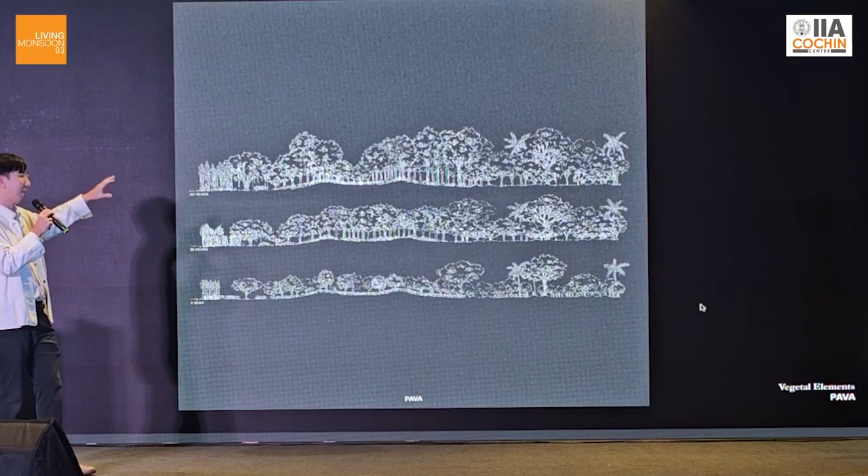From the bottom one is the first year of the planting that we are studying on, and it keeps growing to 15 years, and keeps growing to 40 years. We can start to understand the complexity, the biodiversity of the tree that forms a super complex space in terms of landscape architecture.

So it's very challenging working in the Thailand context. The flood is so normal, how can we design the architecture or the landscape that fits this complex scenario of the flooding crisis.

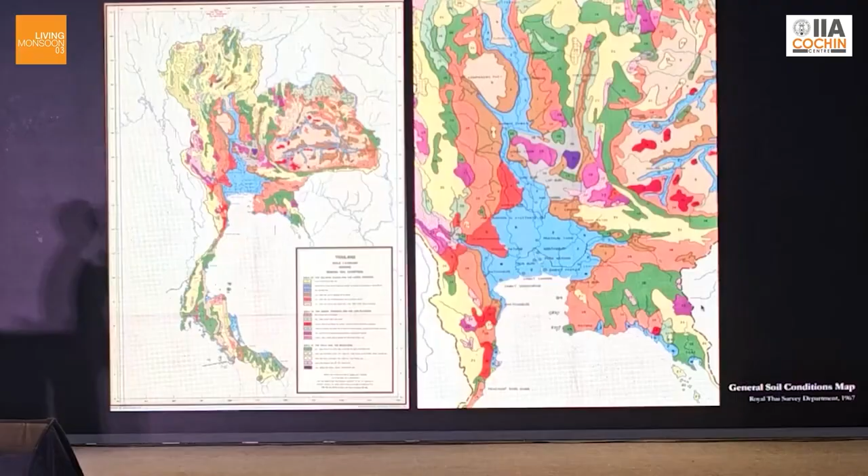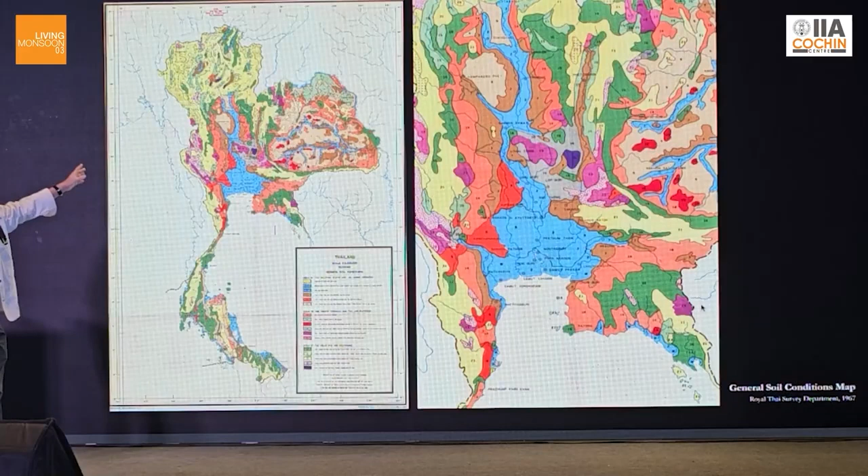Look at this map of Thailand. Bangkok is in the middle, and we have 4 main rivers coming from the northern part of Thailand, combining to form the main Chao Phraya River in the center. Because of the heavy rain of the tropical climate, the amount of water affects the soil so much that we need to find an alternative flooding design in Bangkok.

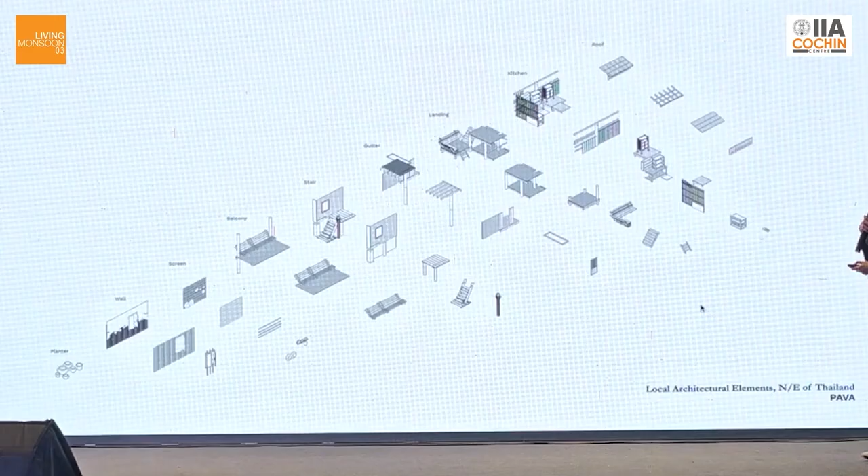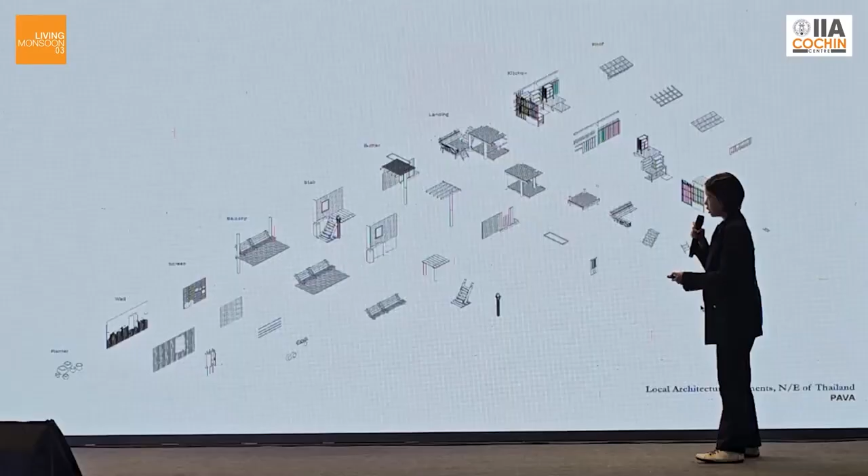We try to record everything that we found in every project. For example, we record the vernacular architectural elements here, like the wall made of bamboo finished with clay, or elements like balconies and stairs—many architectural elements that embrace our life.

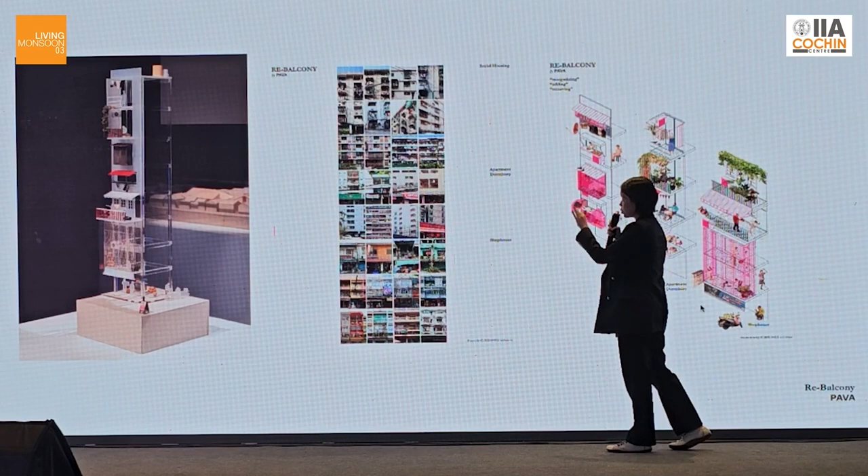Moving to the city, we're concerned about urbanization as well. This is our project researching adaptation during the COVID situation. We all know the balcony is a very important part—it's free, extra area in the house to get close to the outside. We observed what happened in social housing areas, and found that people can easily adapt it themselves, buying things even online. It doesn't need to be expensive to get a comfortable or extra space to utilize.

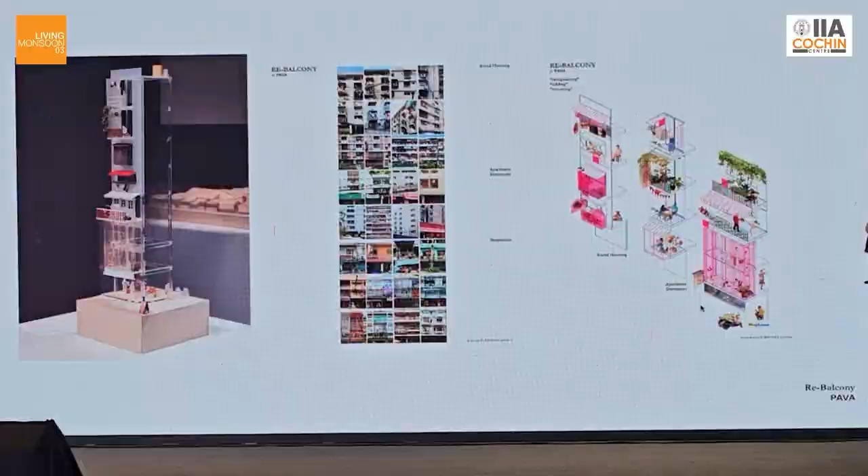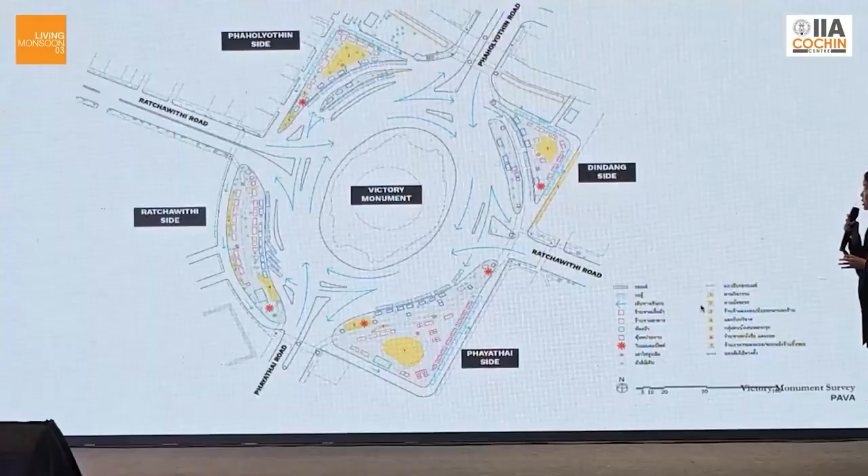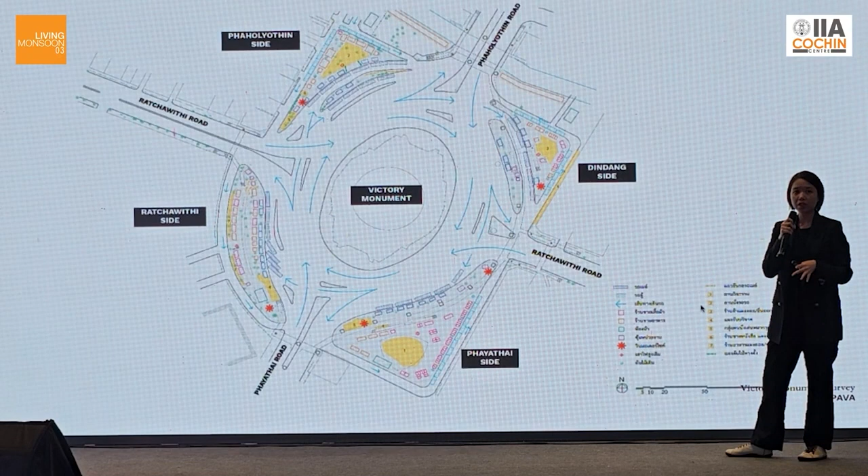Another ongoing project is Victory Monument, where urbanization changes the way people use public space. We try to observe what happened there and improve the connection between the 4 islands around this roundabout, because this area functions not only as a landmark of the city but also as a main transportation hub. Nowadays we have to embrace inclusive design to allow everyone—not just adults who can walk freely, but also handicapped persons—to walk around this area safely.

So in every project we do, we try to understand everything that happened. Like our introduction says, time, place, and context really matter.

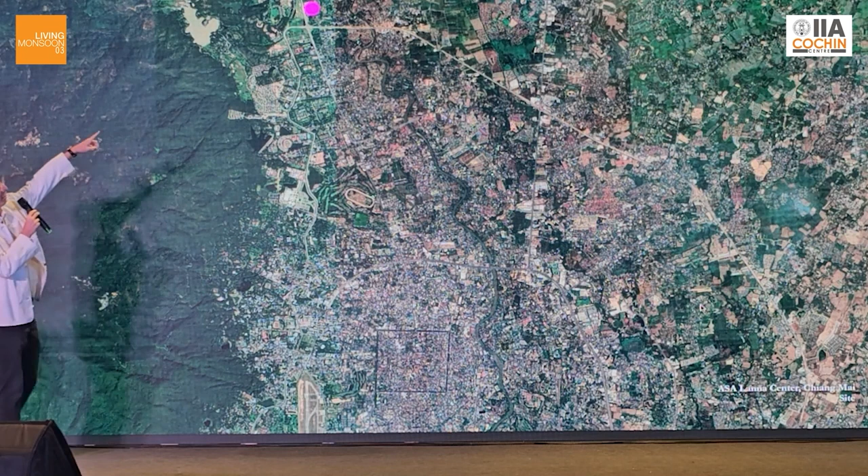When we received the brief for the competition, Chiang Mai faced a lot of flood crises, like the flood crisis you have here in Cochin as well. It's a big issue that a lot of development doesn't care about nature, so when rain falls, they don't have good water management practices in the city. We suggested that as architects, we design architecture that contributes to flood mitigation or water management for the city—that's what our project is about.

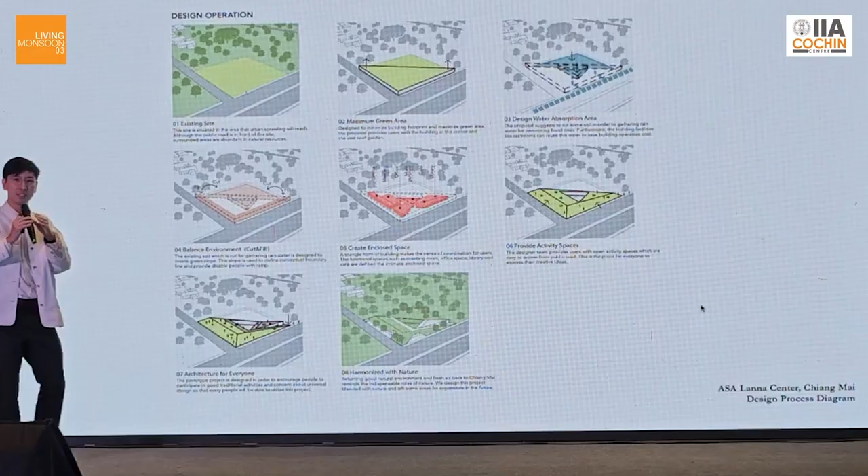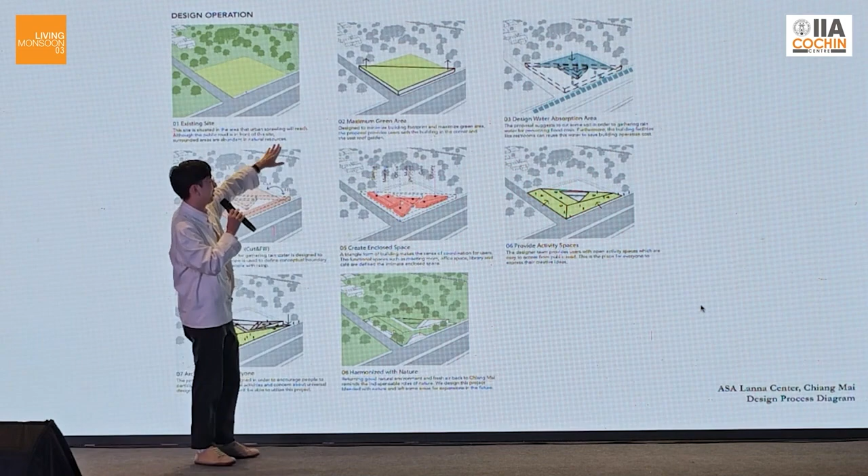Here is the perspective we did 10 years ago. The main idea of the project is: do we need to cover 100% of the site footprint? We suggested doing only half, 50% of the site location. You can see at the back the arrow pushing down.

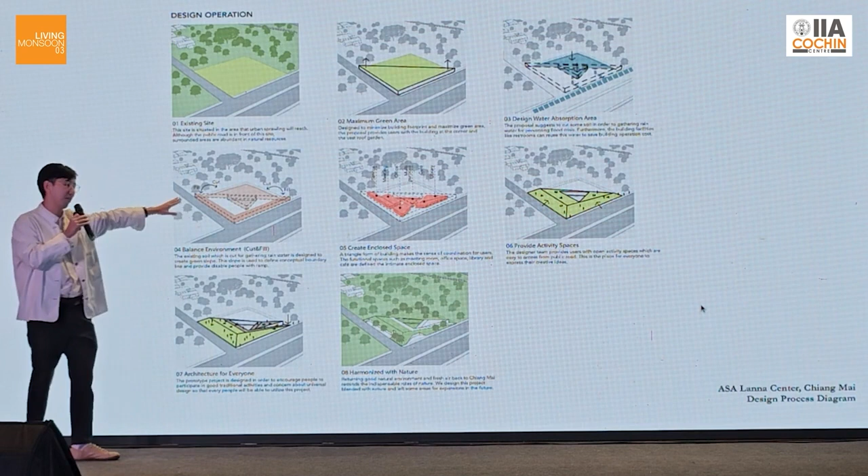In landscape, we call this the cutting and fill technique. We suggest cutting the land at the back of the site and filling at the front to create a water retention area that helps collect rainwater for the city. We also have a small courtyard that minimizes the programs and creates an intimate space, with landscape as the architectural facade, suggesting a universal design diagram.

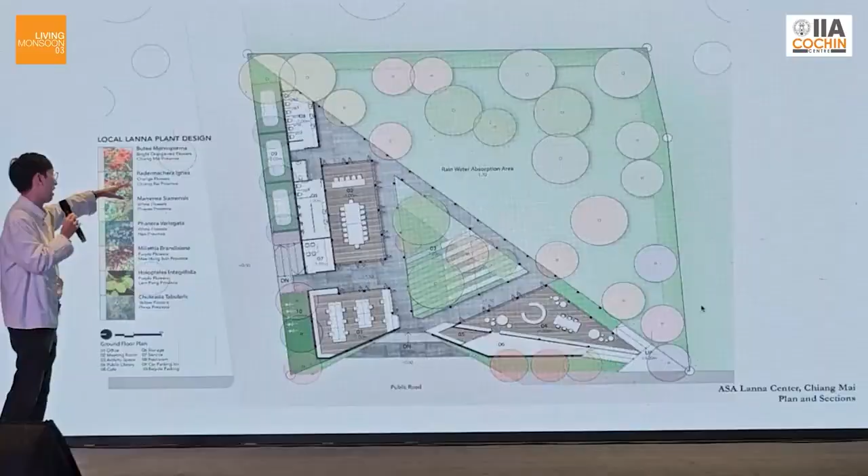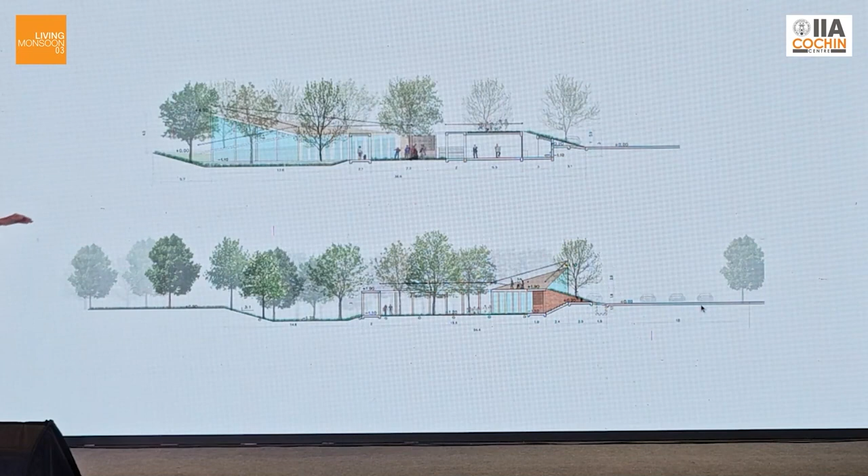Here are native plant species, chosen so we don't create a lot of construction waste. We suggest low maintenance plants that can farm around the site area to form the facade, minimizing the parking lot. Here's the courtyard and a section showing how the back of the project is cut down, using that soil to fill the front of the building, creating connectivity to the public street and a roof garden.

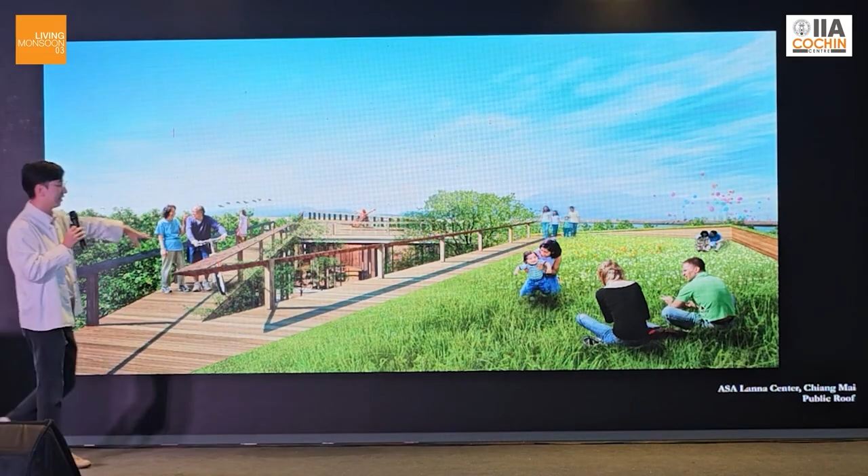This is an old tobacco drying estate since 1955. This is the spirit of the place, and we have to accept that. When we first visited the site, we were inspired by the ambience—the old barns and big trees coexisting—and we wanted to preserve this spirit of the place, because it's the core value of the site.

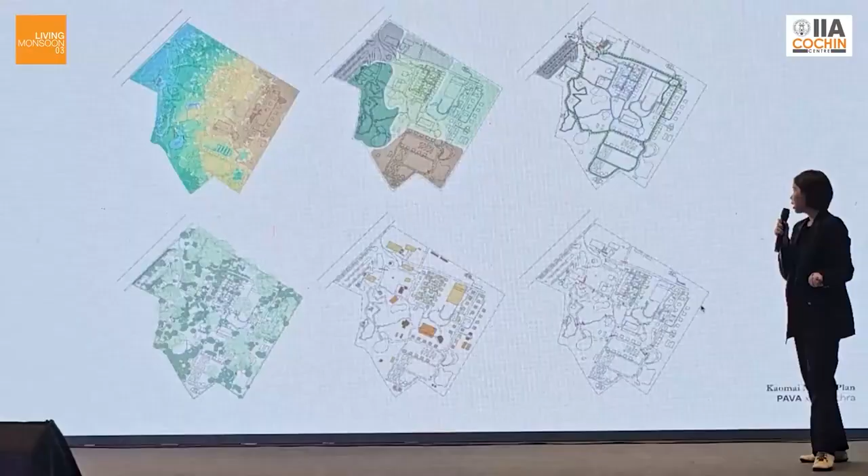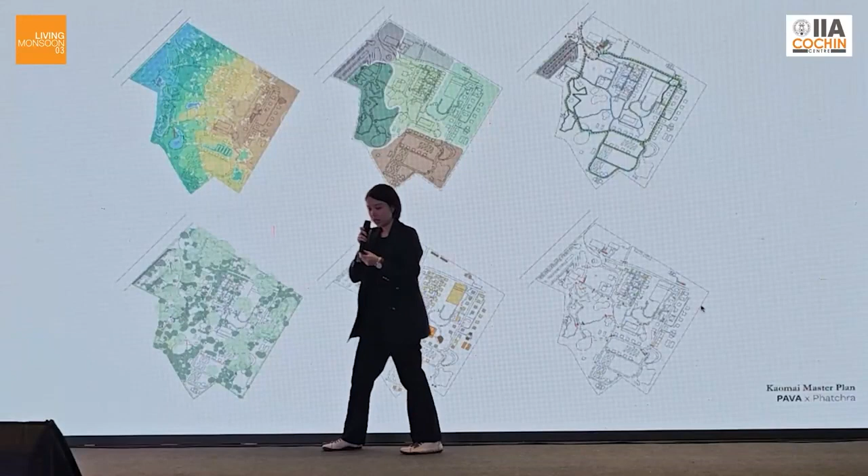We wanted to understand everything on site before starting to design the master plan. It's an incremental master plan, since we've worked on this project for so many years. We tried to understand the water flow—fortunately the conservation part is at the high point, which is useful. We also designed the flow so as not to disturb the hotel at the center.

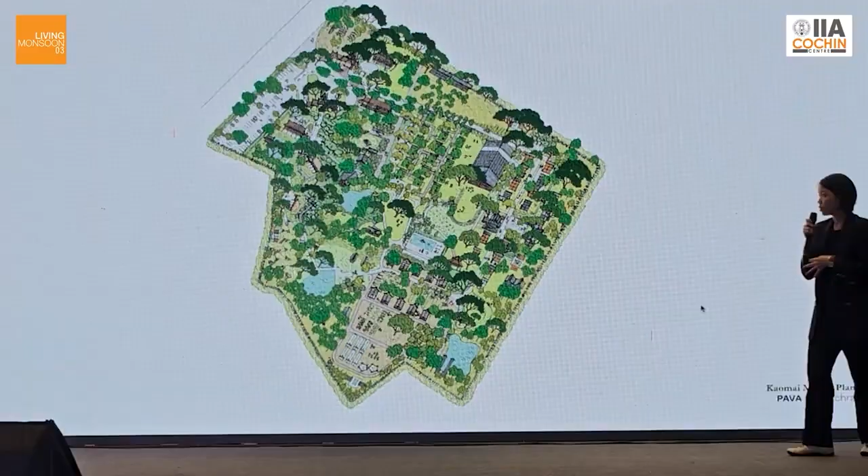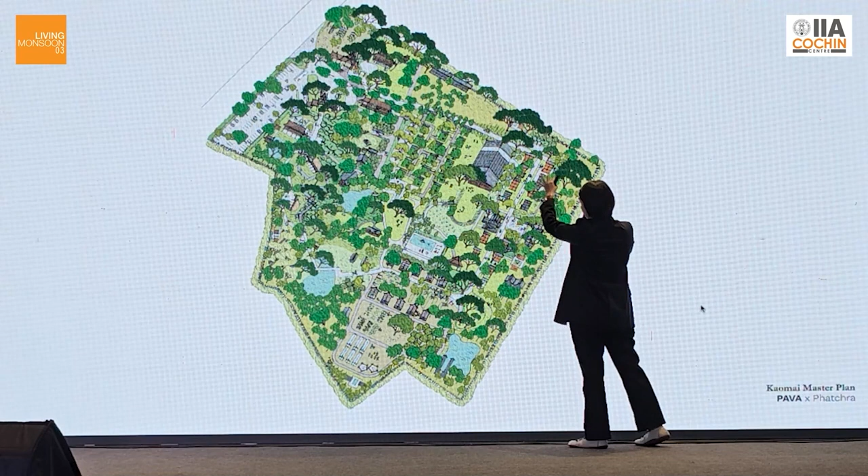We did building inspections to understand every situation on site, and tree assessments to keep them healthy. This is the overall plan where we tried to draw everything and propose something new. This drawing is to scale, since we measured everything to understand it. You can see the conservation part where we tried to keep the old as it is, blending in new functions inside.

You can still see the real witnesses of time. This is a wild preservation area and agricultural area, with many programs coming up.

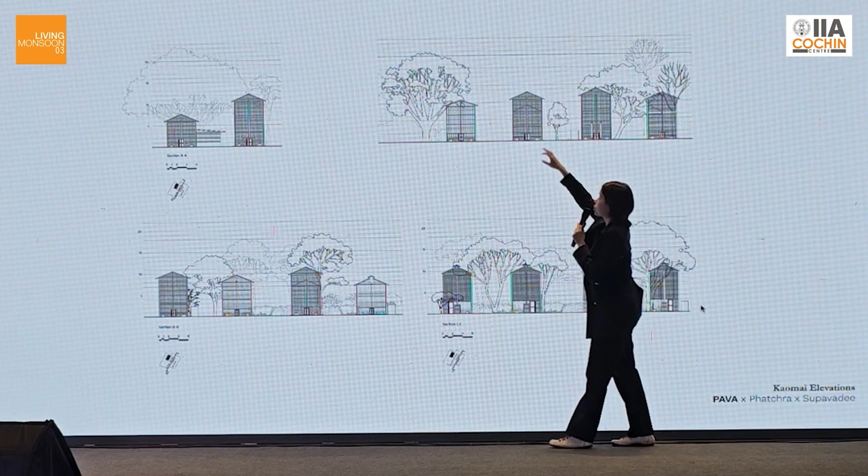This is the building inspection we did. You can see the trace of the old tobacco drying barn from when it was in full operation—they could just build it up. There are so many sizes, and here's the tree documentation we drew.

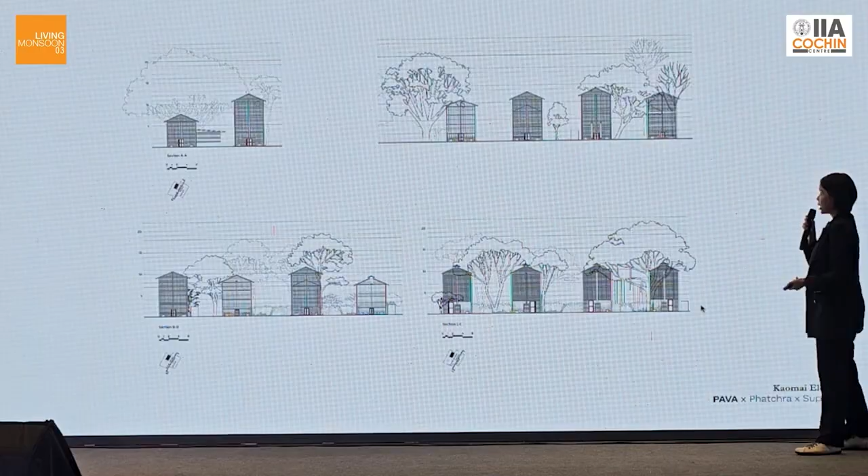This drawing differentiates between the new and old conditions. It used to be very dry around here, but after they stopped the drying process, the trees naturally grew up.

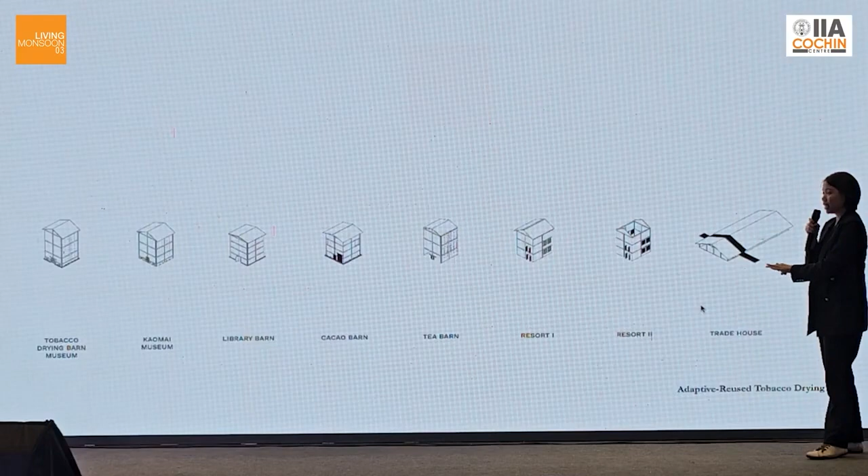In this new building, we had to strengthen each barn differently. These drawings show all the barns where we did interventions—we proposed subtle interventions for each one. The white part is the old element, the black part is the new one, ranging from minimal intervention at the tobacco drying barn museum to more extensive intervention elsewhere.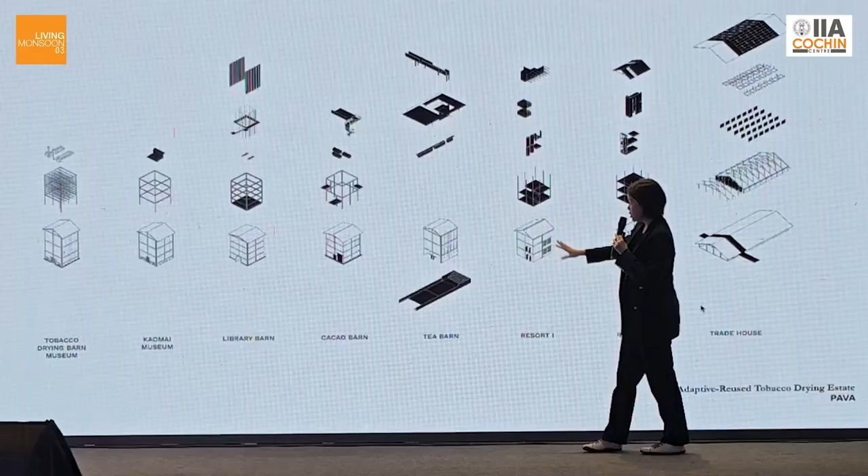For example, this tea barn is quite dilapidated, so we have to reconstruct them again. And the other, the resort part and the trade house, we do intervention for. For more detail about the museum, the first one is in quite fair condition.

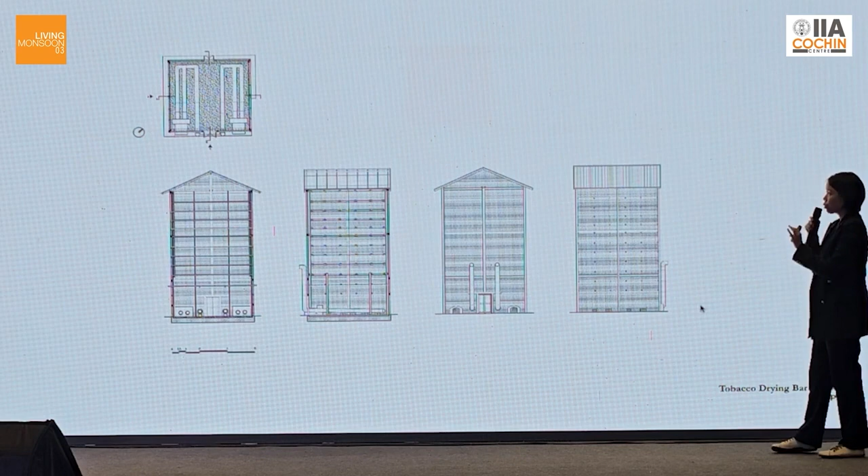So we draw everything, we repair as original, we reinstall the elements that are gone already. This is the overall. We reinstall the furniture, the heat pipe here, and keep the size and typology of the barn, 6 by 6 meters, with the gable roof.

And this is the inside the barn, that we keep as original. The only element that we add is gravel floor and lighting. It's very subtle. We want to propose the subtle design dimension. This is our core strategy because we want to keep it as it is. We believe that in order to learn about history, to understand about ourselves, we need to see the real evidence of time. This is the other generation that I mentioned before.

This is the overall of the estate. We want to highlight this because of the way that we preserve the coexistence between the big trees and the barn. You can see here, we didn't use support to the tree, because we adopt arboriculture techniques to maintain them together. For example, in this one, we use the technique called crown raising and directional pruning to balance them together.

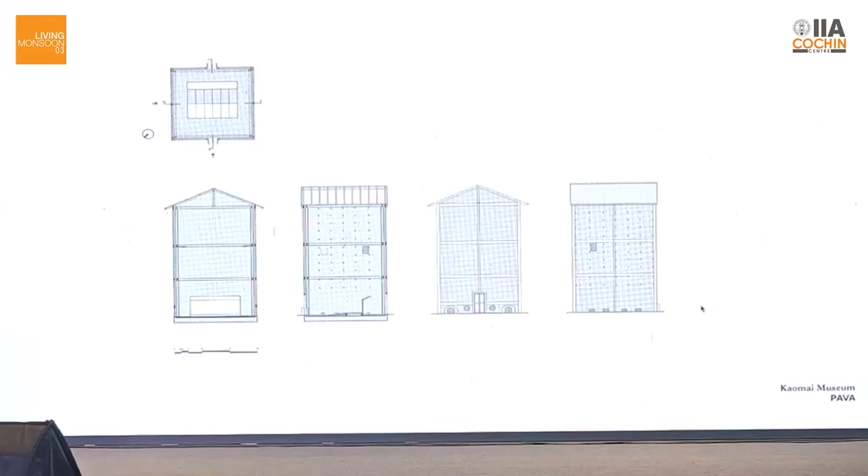The next museum, we have to strengthen them, so we add the steel structure inside. This is the way that we put the steel structure on top, because we cannot put it from the front. This is the ambience inside.

We put the introduction here that we call the timeline panel, because in this project we allow the visitor to walk freely. So we put it here and allow them to walk, to choose to see inside by themselves. Also this kind of steel structure we added here because we allow the extension phase in the future. This is when it glows in the dark, reminding us about the past of the project.

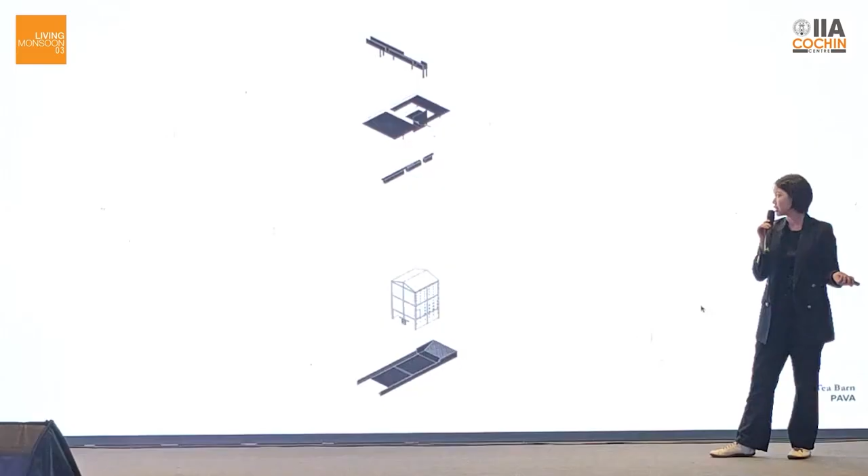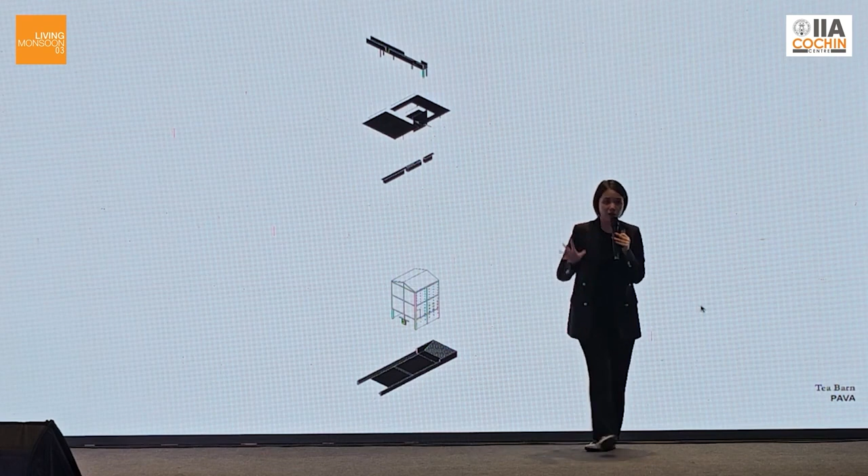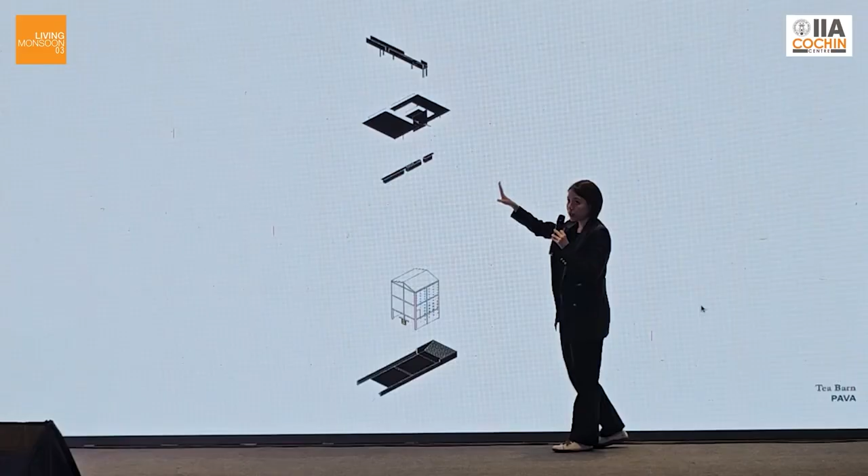This is a tea barn, in quite dilapidated condition, so we propose to reconstruct them again. And in order to contain lots of people, to embrace the public program, to fit our modern day living, we propose more steel structure to be able to contain people and also provide big shading for the area, and also other elements to support tea drinking culture. This is the existing condition.

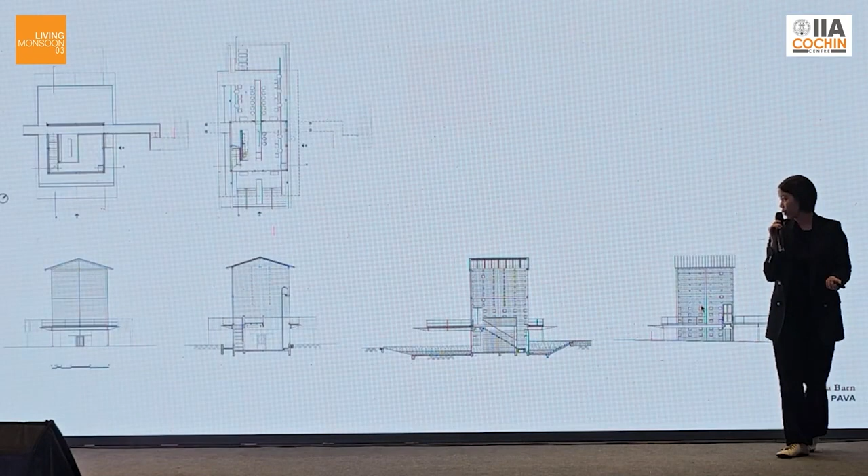When we have to reconstruct them, we have to measure everything and pack it like this, label everything and put it back. This is all the drawing that you can see, the sunken space, the big roof there.

Also we provide this area with many kinds of furniture by the local artisan. You can see here, it's very subtle design that blends into the existing barn. Another side of the building here, the sunken space will connect the nature, blend into the nature inside, also function as water management here.

We use granite here, reflective granite, to reflect the trace of this heritage. This is the ambience inside. We reuse this brick to create the counter at the center again, which you can see here. It's a very old one, and the detail of the furniture.

In every project, we have to accept that in our country we have limited resources, and we have to revise our drawing, like for this one, about 10 times, to fit their skill, to fit the local artisan skill.

And this one, adding steel structure to cover people, it's very helpful when it's raining there, because there is no roof that can cover people when they come here. This one functioned very well during that time. This is at night, the lighting also glows and is very subtle.

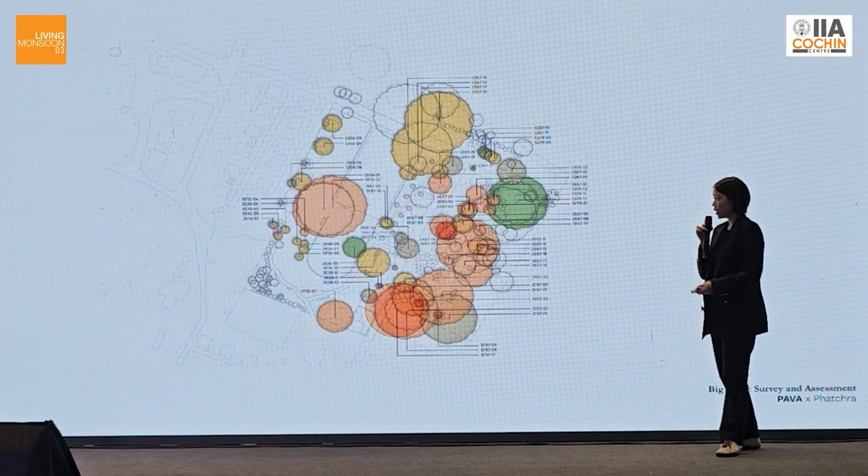This is the overall of the project, that we can still keep the coexistence since we arrived here. And this is the way that we record to check the health of the big tree. This is the way that we adopt the arboriculture technique on site. We label everything and put the signage everywhere to indicate, to allow people to learn, to use as a recreational space as well. Also, not only the barn and the big tree that we can preserve, we still preserve more than 100 species of birds and wildlife.

When we met the owner for the first time, he told us that he really loved to live in a timber house when he was young, and he was also impressed by the scenery of the Mekong. With his down-to-earth personality, he is very humble. These kinds of things inspired us a lot.

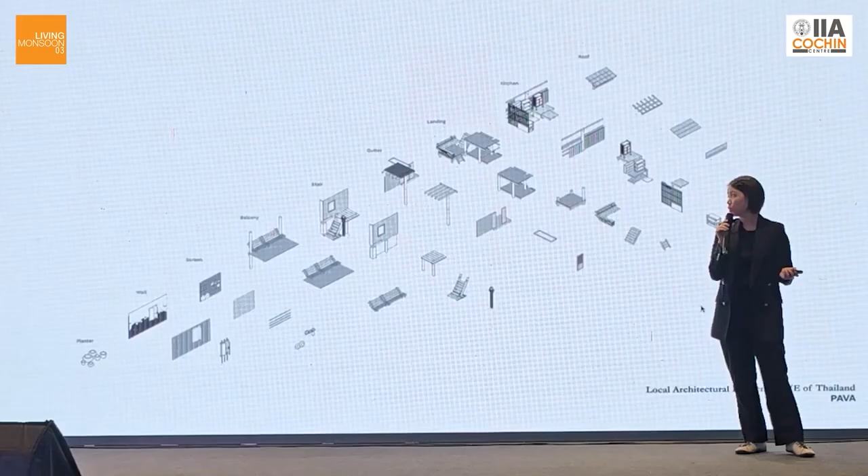Also the vernacular architecture around the area inspired us - this is the house of the monk, vernacular architecture of the group of people we call Thai Lu, and another part we call Thai Dam. We tried to record everything I mentioned, and we proposed the house parallel with the Mekong River, with a setback following the rules.

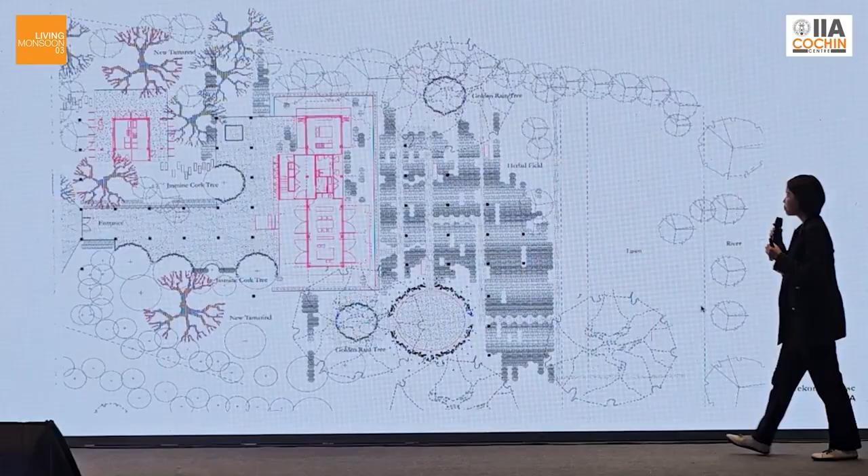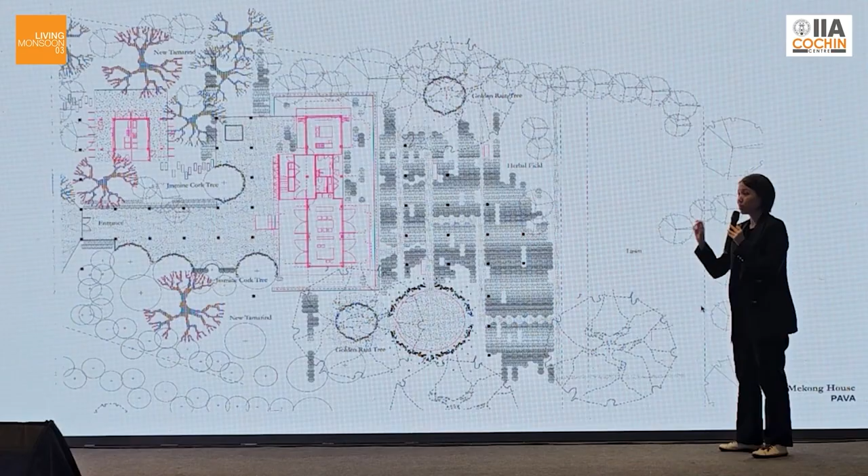Here you can see the very simple rectangular plan, like a modern plan, but we optimized the timber structure to 4 by 4 meters. A very simple one - it's like an open structure that allows life to blend inside.

We reuse wood from a rice mill, and this is a working drawing that the owner, us, and the contractor worked on, on site. In this building, the owner worked really hard with us - he can remember every piece of timber that he got. It was constructed piece by piece, which you can see here.

This one is quite clear - we simply use the timber structure honestly, a very straightforward one, and we pack all of the MEP system at the center in order to not obstruct the view of the Mekong River.

This is our simple plan here - it's alive inside, and we pack all the toilet and system at the core. You can see the dash line here, like a balcony on top, cantilevered, with a very big roof here. So for sure the user can live comfortably inside.

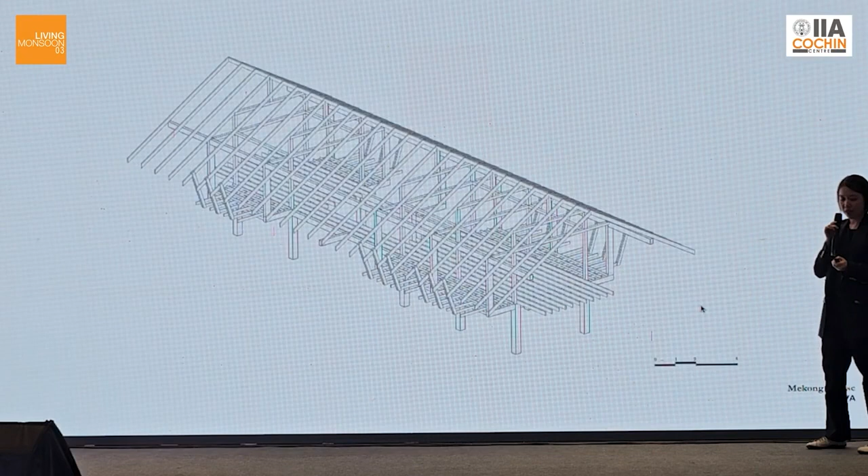This is the structural diagram, straightforward structural, and this is our big roof. So normally in Thailand we can sit here at the transition space when it's not too hot, or even when it's raining.

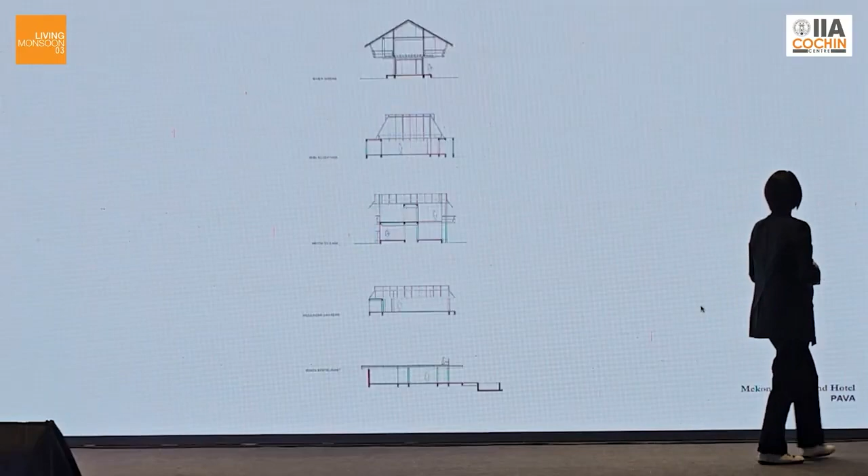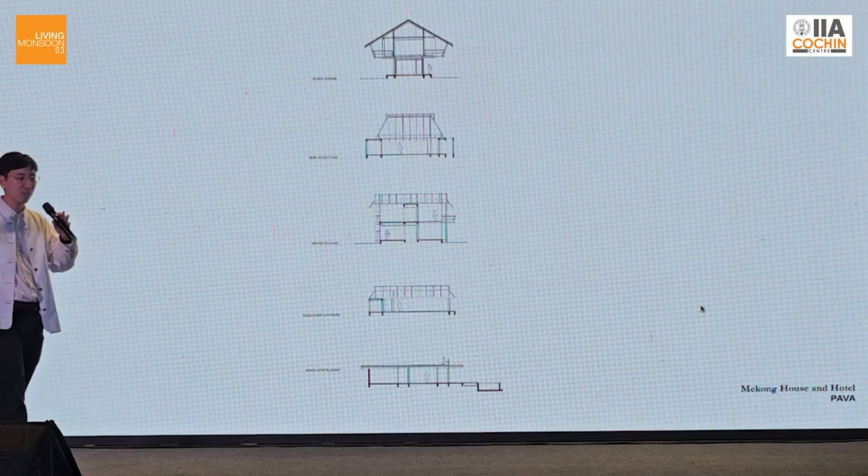After we finished this house design, we tried to develop the idea of a compacting plan. It's like a skyscraper, where the circulation and MEP was packed in the middle of the plan. We're developing the idea to turn it into a hotel in the future, trying to find a way to minimize the construction budget.

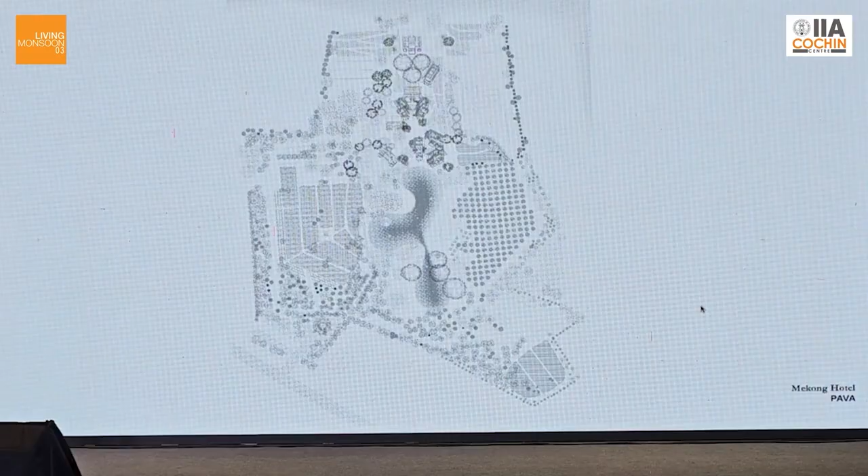Right now it's a work in progress on the hotel design we are working on. Here you can see we developed local craftsmanship to create very special material textures, with native glass and earth that's painted onto the wall. This is the hotel we are working on, in progress.

As I mentioned this morning, you can see a lot of shading here. It's the beauty of the tropical climate, where the sky is so bright, and because of the roof you can see the darkness and some shading and shadow that is very beautiful.

Another thing we want to point out is that we want to show people that using timber doesn't need to be all perfect - it can be different colors, different textures, but combined together. We think good design doesn't need to be perfect, it can be imperfect, no need to be perfect. I think that's a very special sense of the design as well.

Here is a photo we took last year - it's like a tectonic where you can see we tried to minimize the timber structure. You can see we tried to cantilever the structure as much as we can, because we want to reduce the number of timber columns.

We use only a few columns, cantilevered in all directions, to gain a lot of usable area for the project. Here's another roof angle that we studied from local vernacular architecture, fitted to the climate conditions. Here is the interior space.

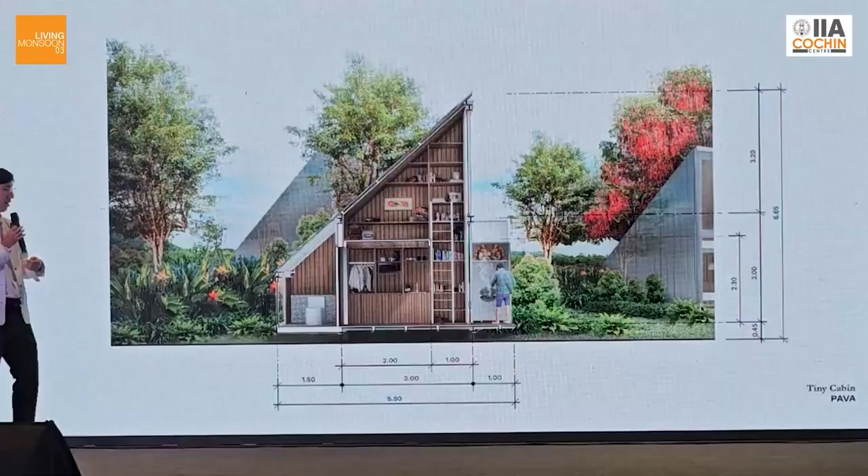Only 4 columns of steel structure - one, two, and one outside, two - with a basic gable roof structure that collects the rainwater here. We call this the rain garden. We pick plants that fit the water conditions, and we contain this water and move that amount into the watershed area.

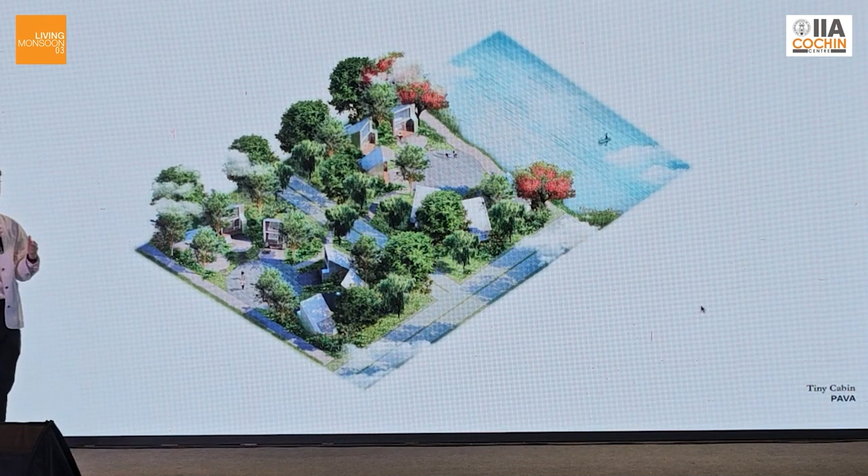Here's a diagram we showed to the client: we have a small footprint for the hotel and the housing, and all the tiny cabins collect the rainwater together as a network, combining it and letting that natural flow of water go into the watershed area.

You can see the view angles are not blocked by each other due to the strategy of the site plan. As I mentioned, the 4 columns use steel cantilevers again, and we picked a galvanized steel finish with a reflective effect of nature to try to blend visibly with the landscape.

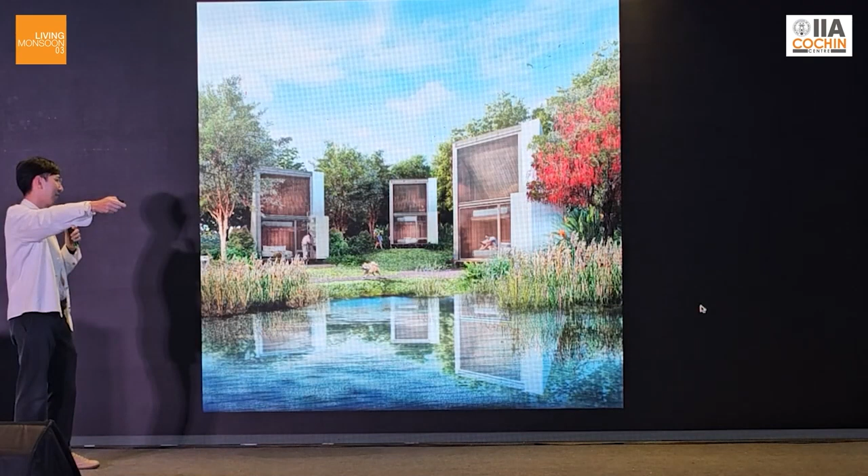I heard the sound, but it's okay. It's the ambient of the design.

And here is another view angle of the tiny cabin.

Before building the mock-up of the design, we worked with the client on how we could regenerate and help increase the fertility of the soil for the project. So we planned an event that helps increase the nitrogen in the soil here.

Okay, and here is the very first mock-up that we took last year. Here, the 4 columns of steel here is like the back of the bedroom, and you see the rain garden at the back of the roof here, and we have a little bit of skylight that allows natural light to come into the bedroom. On the left hand side is the mezzanine of the bedroom.

At night, we test the lighting fixtures in this project, and that's the plan we started doing almost 2 years ago.

And we moved from a very small project in southern Thailand to a very big project in Bangkok. We did a medical program as well, right in the heart of Bangkok. We've been working on it almost 4 years already.

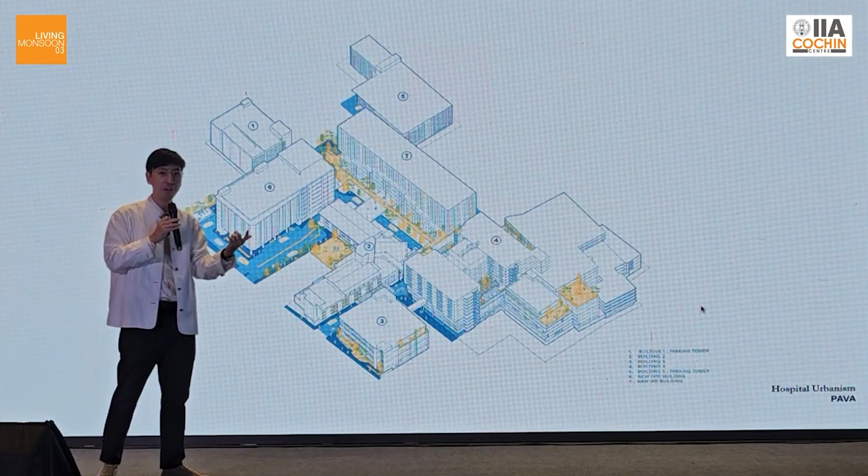Whatever we can do now, we do. But in the future, we're planning for the larger infrastructure that helps improve the condition of the hospital as a whole, in the long run.

So here is the first example of the quick fix approach. We found an empty space inside the hospital - here is the existing concrete roof. But the problem we found in the hospital is that there isn't enough waiting area for people. People have to wait 6 hours.

So we introduced a minimum intervention that helps increase that waiting area while also increasing the green area. And here you can see the steel structure, which is so minimal.

And here is an example of the wide span structure, with a double roof there, adding more green and more finesse to the hospital. And you can see that we cannot add a lot of weight.

So the thing we decided that is so invisible is the mixture of soil here, which we developed with a horticulturalist, trying to mix earth that isn't too heavy to place on the roof, and plants that aren't too heavy either.

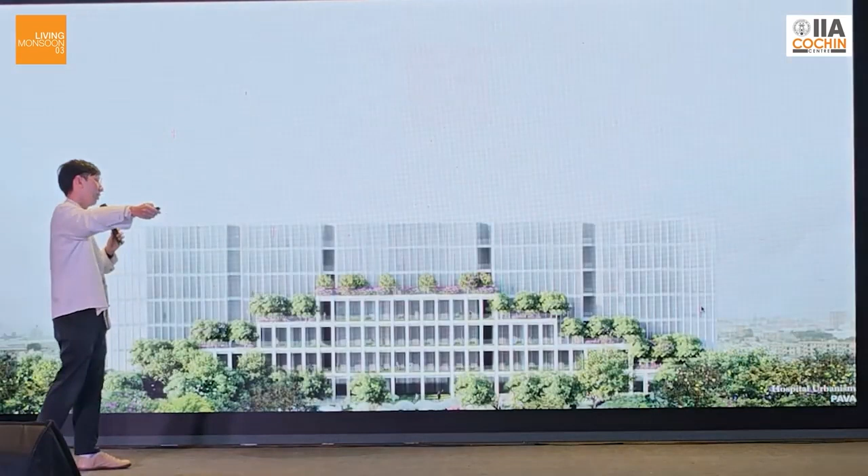Here's a perspective that we sent to the client, and also a progress shot of the construction. We also developed the typology of the treatment room, examination room, and some therapy spaces inside the medical programs. For the future phase of the larger project in this hospital, we want to create a green corridor that links all the existing buildings together, improving the social infrastructure and green infrastructure, and providing a very good quality of life for patients and everyone inside the medical campus.

Okay, last project. You can see here that our project embraces change. We know that nowadays we have to live in an uncertain situation that occurs quite often, and our project tries to revive, adapt, and transform all the time.

This one is another example: a Thich Nhat Hanh Living Museum in the central and eastern part of Thailand. This area is in a Thai Plum Village. We call it the spiritual home for the community of the Buddhists. It's a place where people come to practice mindfulness. This is the hut of the founder, Thich Nhat Hanh, when he was alive.